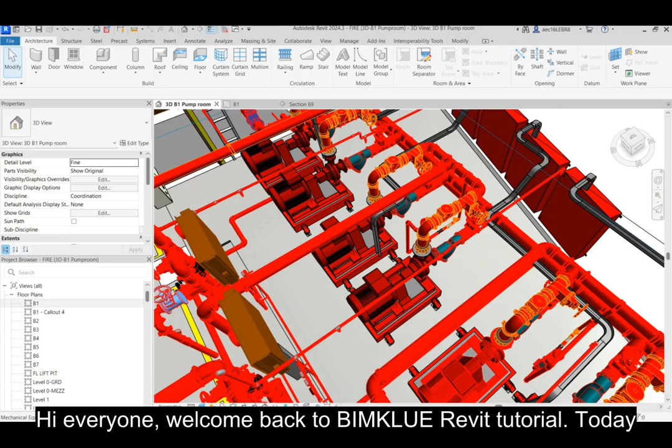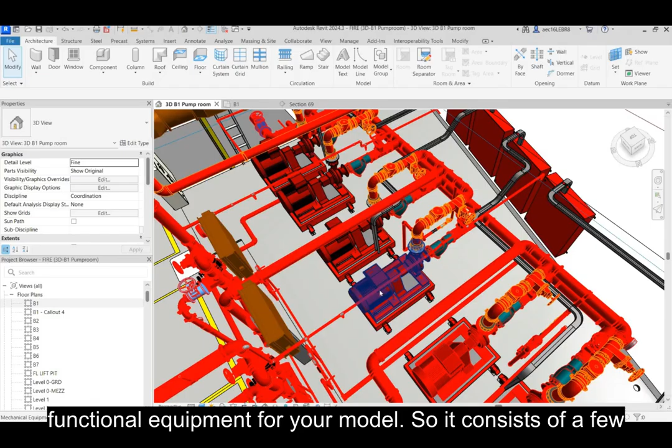Today I'm going to show you simple steps on pump assembly. Basically I will show you how to assemble your pumps with all the pipe accessories together to set it up as a functional equipment for your model. It consists of a few components: of course the pump itself, pipe accessories and the fittings. So let's start step by step.

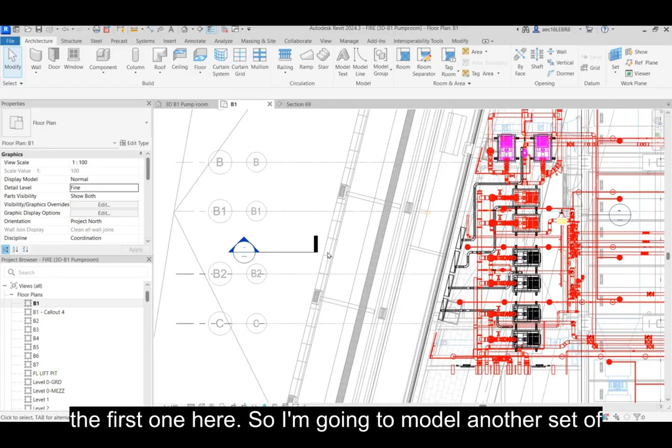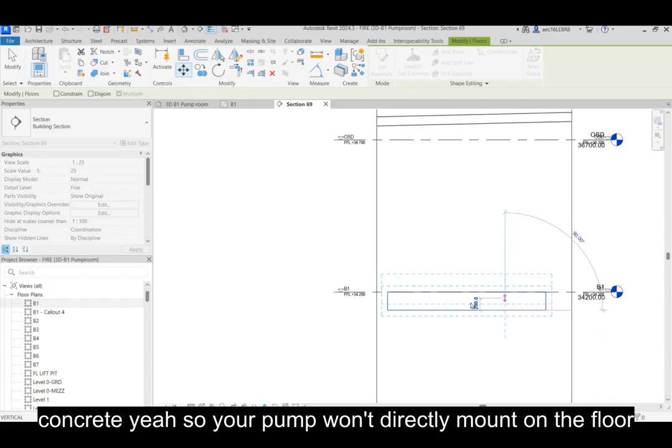Okay, so come back to the topic today. I will show you the first one here. I'm going to model another set of pump here. First of all I'm going to click on the floor. Of course, talking about pump, we worry about the vibration, so we need a concrete plinth. A concrete plinth basically is a raised-up piece of concrete, so your pump won't directly mount on the floor structure and transmit the vibration to the structure and eventually damage your structure floor. So the function of the plinth is like this.

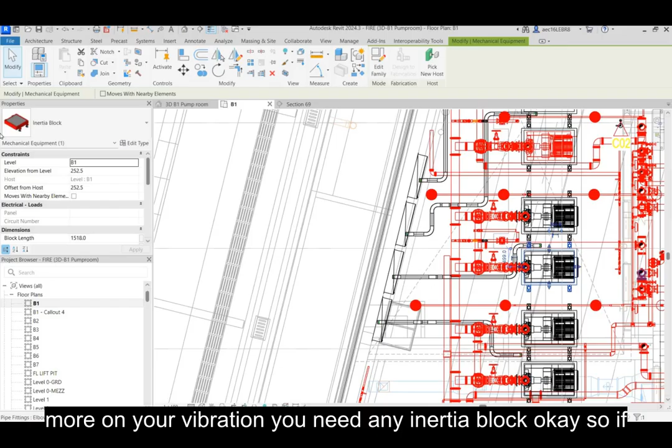So what is this? Basically it is a piece of concrete. Next, if you want to absorb more of your vibration, you need an inertia block. An inertia block basically is another piece of concrete which is cast into a steel bracket with a spring isolation. So when your pump is running, the vibration will be absorbed by the spring isolator instead of transferred to your structure element. So this is how you mount your pump, basically sitting on the inertia block here.

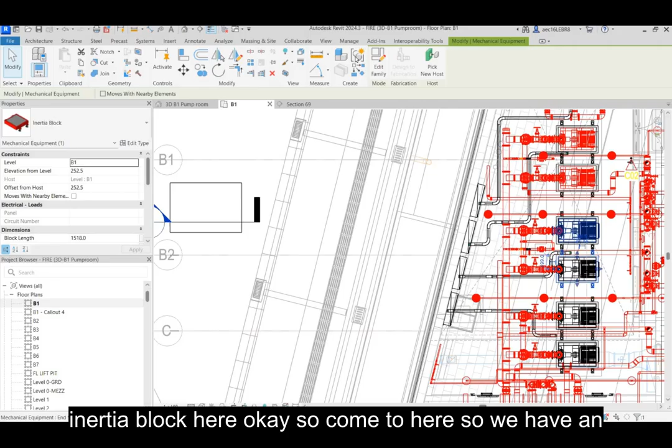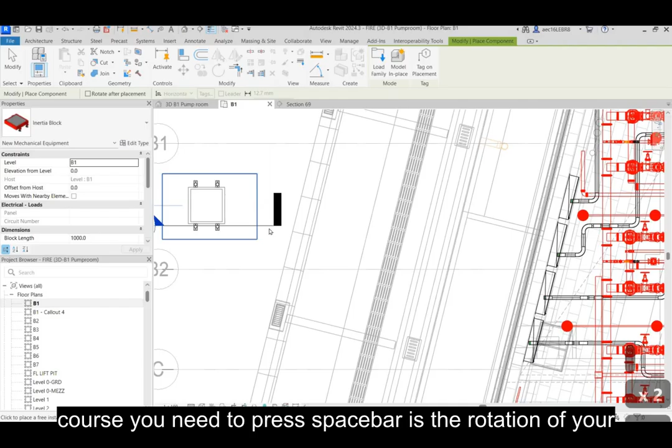So we have an inertia block, and we place it here. Go to System, click on Model, click on Component, then find your inertia block and just put it here. Of course you need to press the space bar for the rotation of your family. Due to the time constraint, I have my inertia block ready.

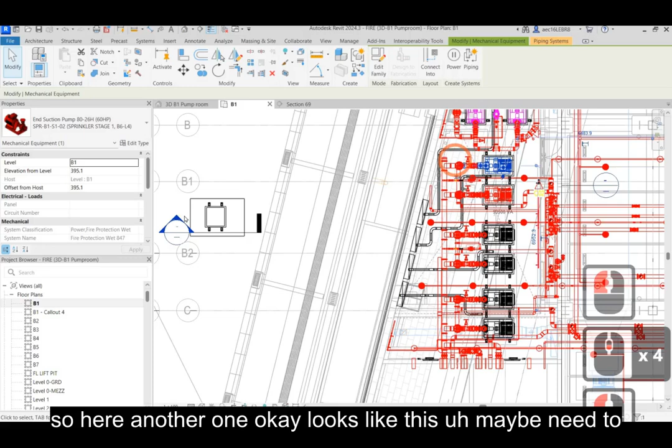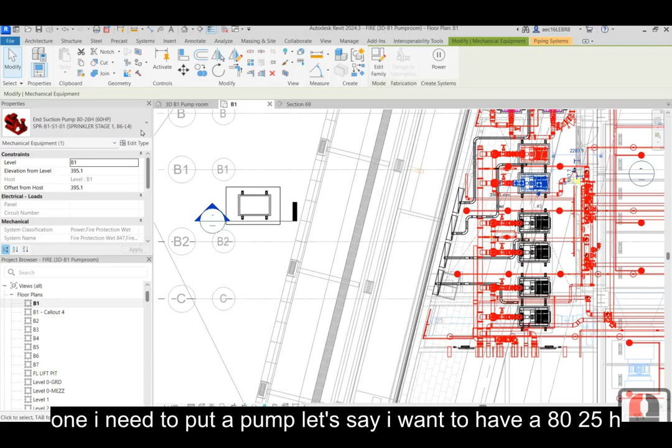Okay, so here another one. It looks like this. We need to pull it longer. So how to do it? Because I already included the parameters in this inertia block, you can modify the dimension of the inertia block. Next, I need to put a pump. Let's say I want to have an 80-26H pump, which is a 60 horsepower pump.

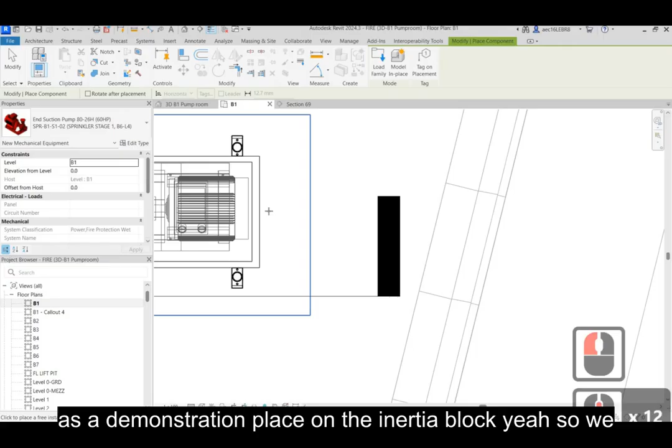Come here again, go to the System tab, then Model, then click on Component, then we have a pump. Let's say I'm going to use this pump over here. Just place a simple pump here as a demonstration, placed on the inertia block. So we have double protection. Normally most projects won't use an inertia block. Of course, if you want more sensitive vibration tolerance, then you need an inertia block here. Okay, so now it's done.

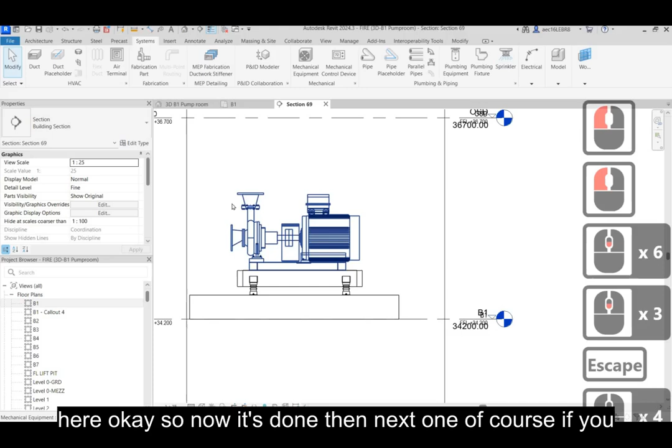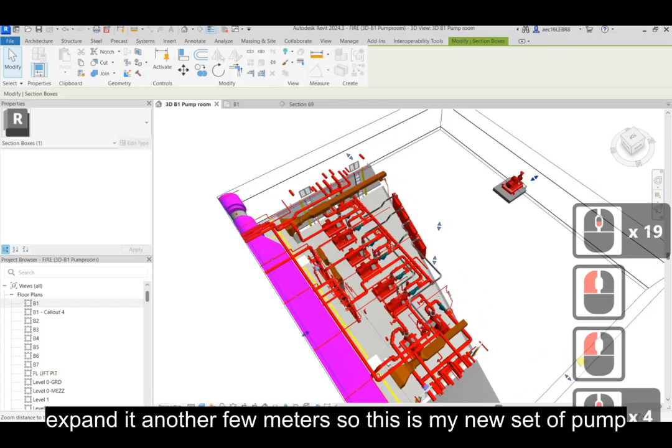Next, of course, if you want to model a pump, you need to have connectors, one in and one out. This is basically an end suction pump. If you want to see 3D, I'm going to 3D. I expand it another few meters. So this is my new set of pump here. This is the end suction pump.

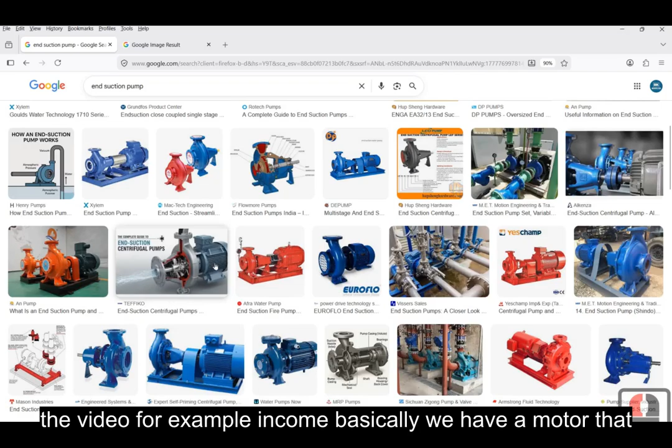So how does the end suction pump function? You can go to Google and search what is an end suction pump. Basically we have a motor mounted on the pump impeller here. When the motor is spinning, it will suck the water into the inlet here, then push it out from here. This is the outlet. So next, go back to our section view over here.

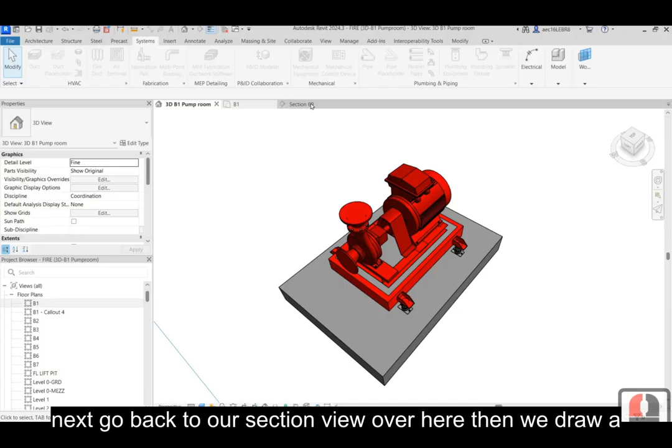Then we draw a pipe out. Just draw a pipe out will do. Then drag a little bit. So this is the outlet. Yeah, just draw a pipe here out to where? Then I'm going to leave it first.

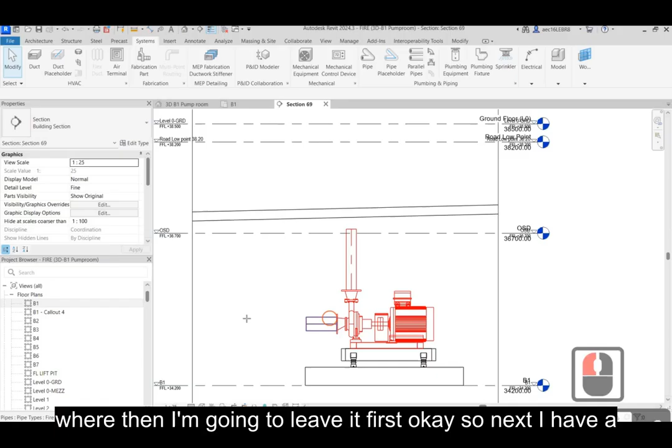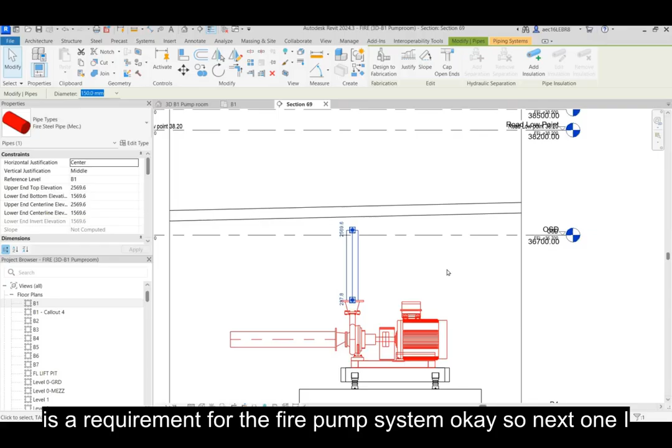Okay, so next I have a 200 mm pipe inlet. Then I have 150 outlets. Basically the suction has to be one size bigger than the outlet. This is a requirement for the fire pump system. Okay, so next one, I need another vibration isolation device, because I don't want to transfer the vibration of the pumps to my piping system and loosen all the parts and fittings of the piping.

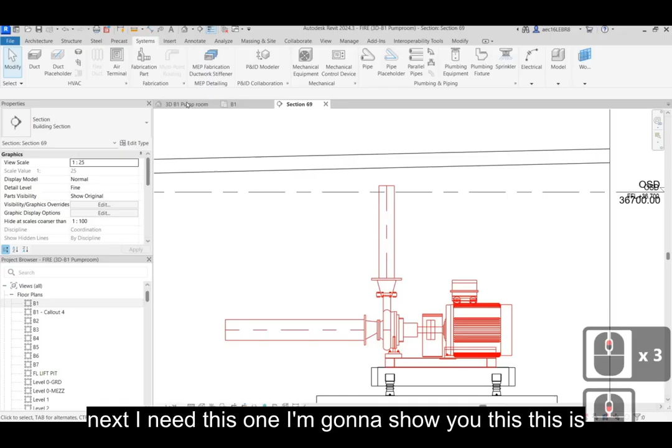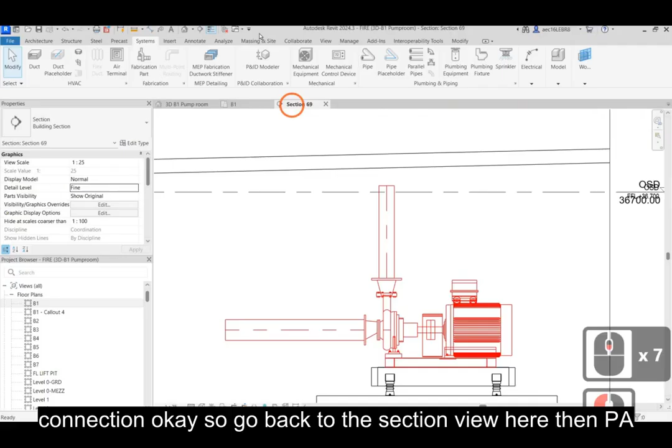Okay, so next I need this one. I'm going to show you this. This is basically a flexible joint of the pump, a flexible expansion joint. Basically it is a flange with a rubber connection. Okay, so go back to the section view here. Then PA is the pipe accessories. PA is the pipe accessories shortcut key.

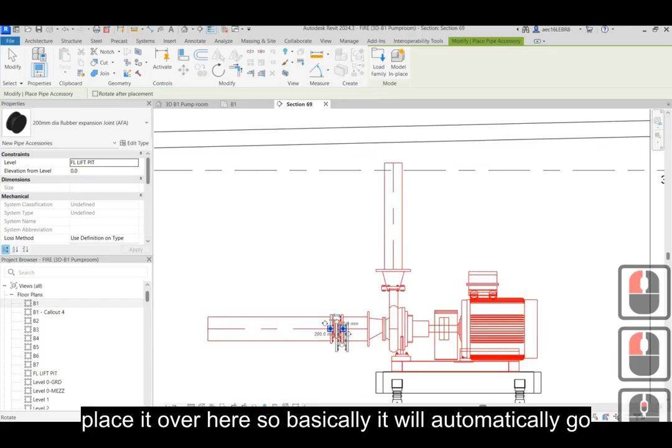So I search the joint, flexible joint. Okay, I have 200 mm. So I place it over here. So basically it will automatically go into my piping system. So PA again, I have 150 mm expansion joint. I put it over here. Okay, so the vibration from the pump won't transfer to my piping system.

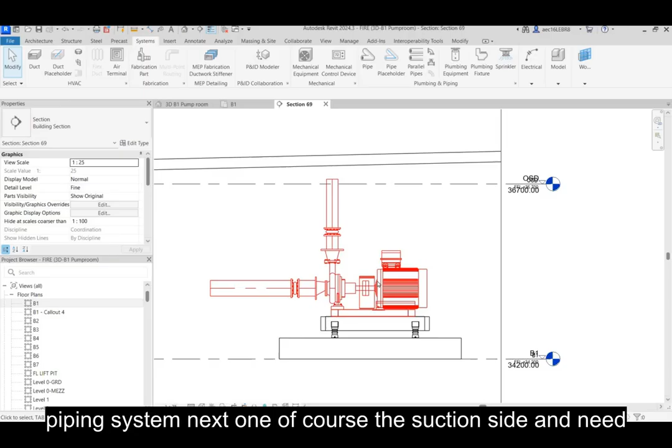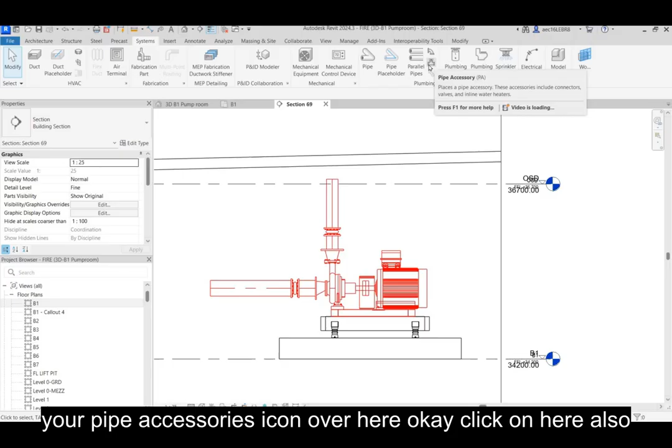Next one, of course, the suction side needs some sort of filter, so I need a strainer. So PA again is the shortcut key for pipe accessories. If you don't want to use the shortcut key, you can go to the System tab here. You find your piping, then you have your pipe accessories icon over here. Click on here, it also brings you to the pipe accessories library. Okay, so I need a strainer. 200 mm strainer will do.

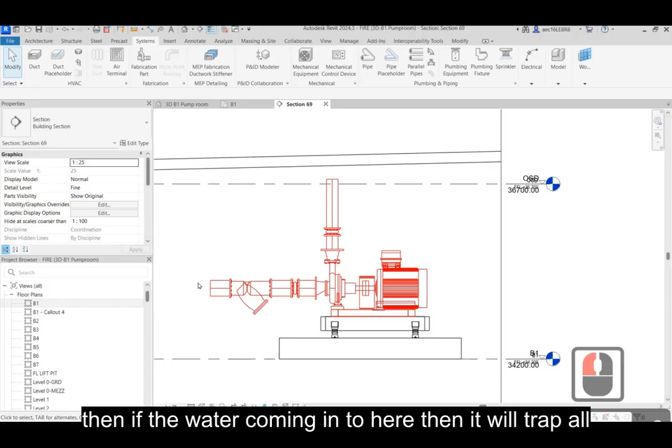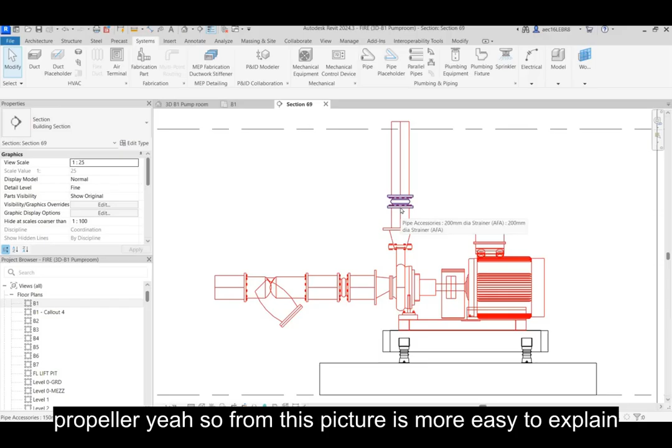Okay, click on here. Then if the water comes in here, it will trap all the small stones in this device. So if you want to service, you just open this flange to clean out all the small stones that could damage your propeller. From this picture it is easier to explain. The water goes through here, flows into this basket, then flows out. So all the particles and stones are filtered here, then the water goes out to your pump, so it won't damage your pump propeller.

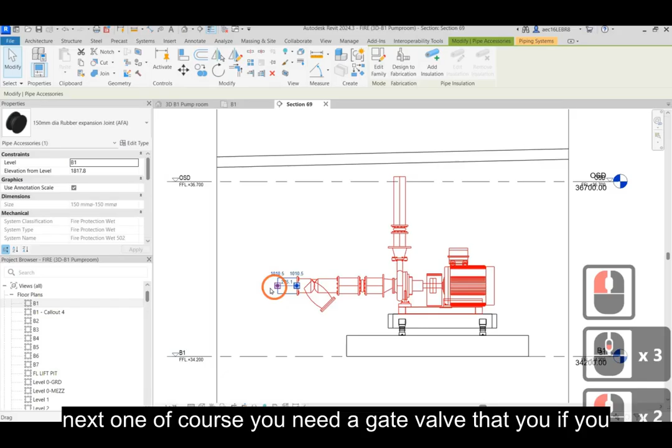Next one, of course, you need a gate valve, so if you want to carry out services to the system, you can stop your water. PA again to access your pipe fittings, then you need a gate valve here. So a 200 mm gate valve, just put it here so you can shut down the water supply.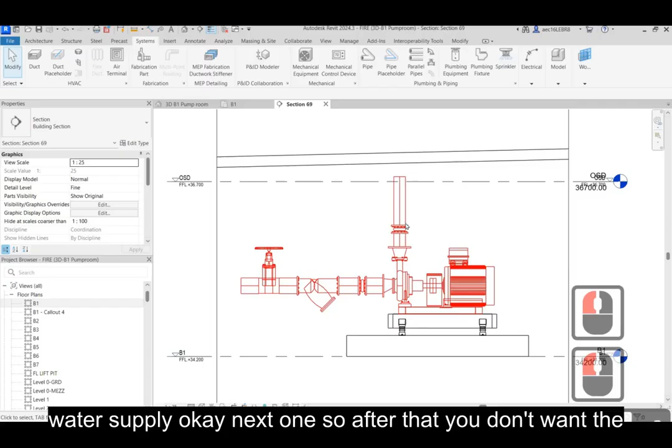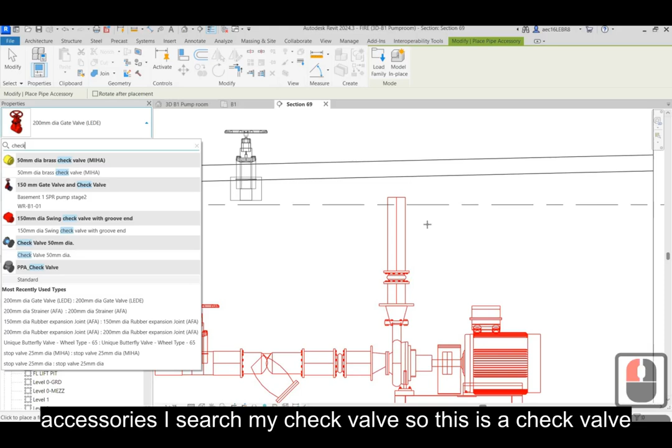Okay, next one. After that, you don't want the water to backflow into your pump, so you need a check valve. PA again to access your pipe accessories. I search my check valve. So this is a check valve here. I just mount it here. Of course you can rotate. This is a check valve.

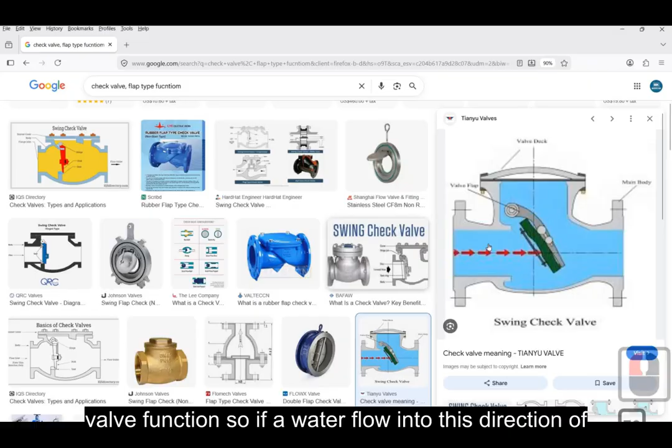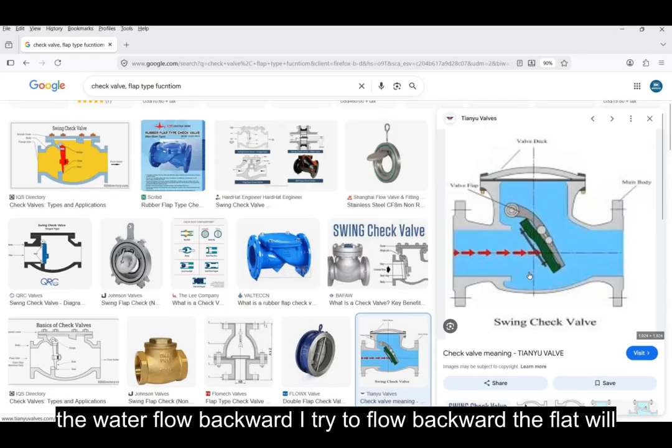So how does a check valve function? If water flows in this direction, the flap will be open to allow the water flow. If the water tries to flow backward, the flap will be closed, so the water won't be hammered back to your system, which would damage your pump too. If you talk about a very tall, multi-level building, the water pressure that backflows into the system is actually very high, so it can potentially damage your pumps.

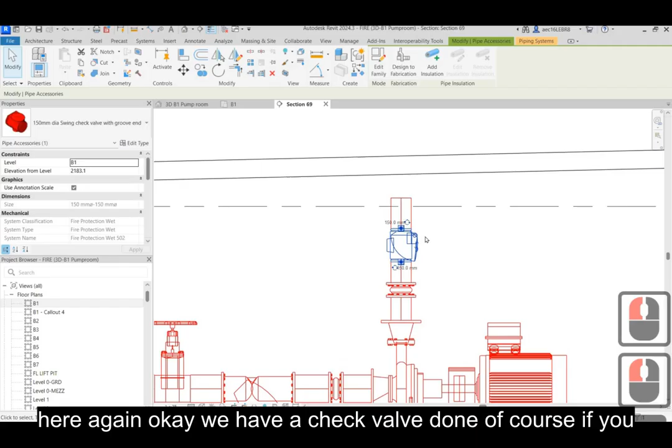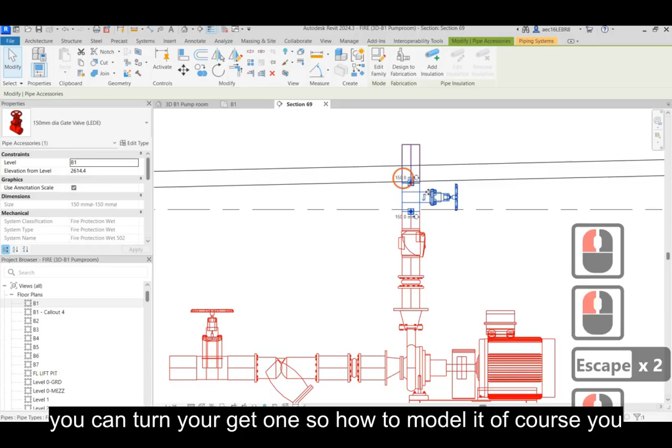Okay, back to here again. We have the check valve done. Of course, if you want to do any services, you need a gate valve. Another gate valve again. PA for your gate valve. You need to access the 150 mm gate valve. Another gate valve over here. So how to model it? You can learn it from my course. Step by step, I'll show you how to model the gate valve from a blank workspace.

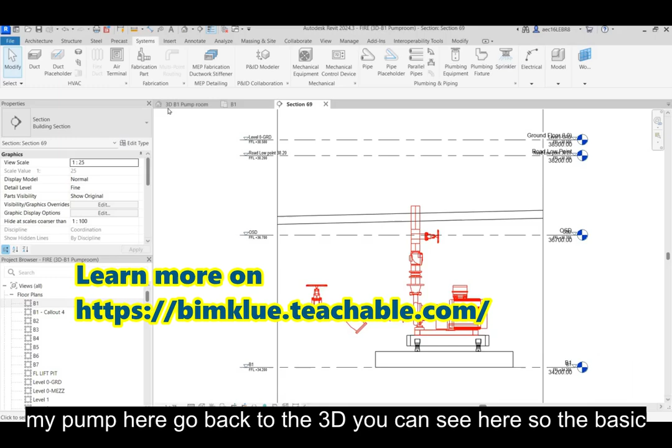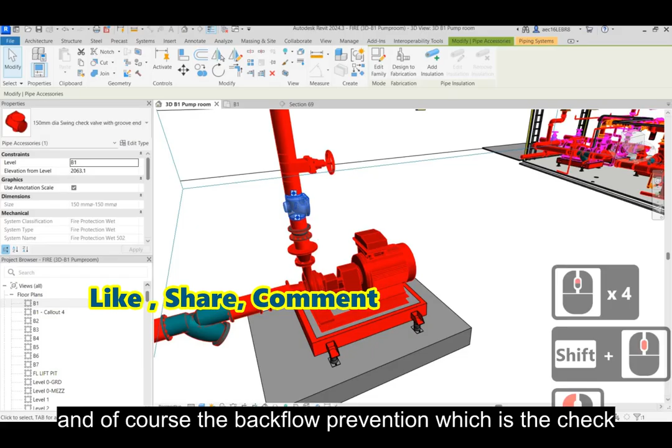Okay, so it's done. This is the basic assembly of my pump. Go back to the 3D. You can see here the basic components: gate valves in and out, a strainer for the incoming, the flexible joints for both incoming and outgoing, and of course the backflow prevention, which is the check valve over here. So I guess that's all for this session.